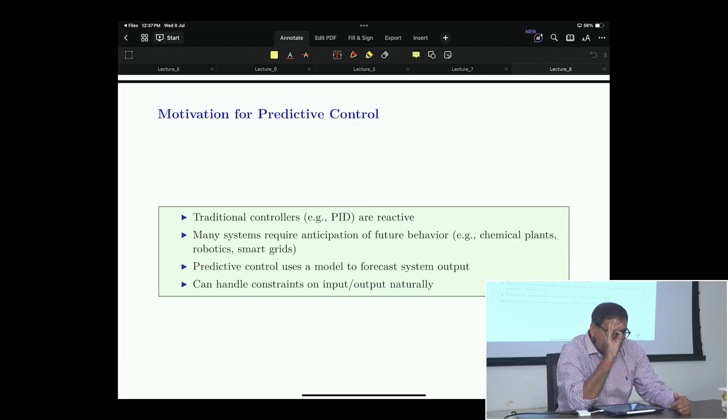So in the model predictive controller, you take a model which will predict, right? Based on the prediction, you design the controller. Got my point? Nowadays you will find in the literature, people use the term model-free predictive controller.

Model-free predictive controller. If you really look into that, I'll tell you, there is nothing like model-free predictive controller. There is nothing like model-free predictive controller. When they say it is model-free predictive controller, what essentially they do is collect the data,

do the online estimation, that estimator is predicting the output. There is no explicit model for that, but they estimate it, right? So there is nothing like a model-free predictive controller. You have to do something to predict it, right?

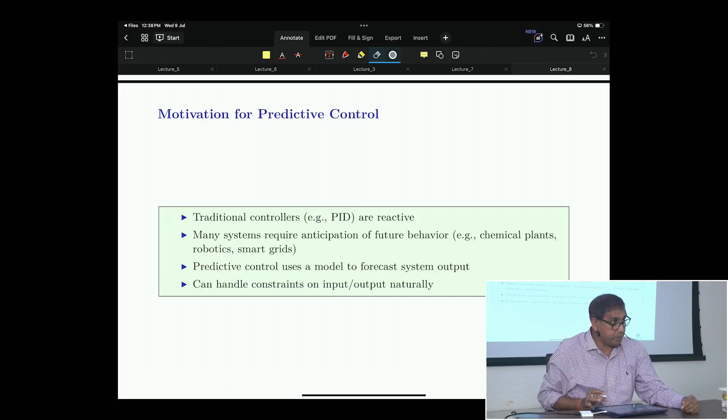So traditional controllers are reactive. Many systems require anticipation of future behavior. Predictive control uses a model to forecast the system output, right? It can handle constraints on input and output naturally.

Okay, let's see. This example, I got it from some book actually, but it's a standard thing.

This example I've taken from a book. This is not my example.

Suppose you are going to cross the road. Crossing the road, actually, Indian people can understand it in a much better way than foreign people.

Once I was in Hyderabad at a conference. Two of my PhD students are from Palestine, Ihad Akila and his sister Lama. So they came with me. I told her, I am going and you come, I will show you Hyderabad also. I have got some students working there.

So I told her I will organize the car and other things, you don't worry for that, those things are taken care of. She said, okay, we will go. So what happened, the conference was in Osmania University, and we were staying in the town.

The bus would come to take us to the conference site on the other side of the road, and we were on this side. There was a bus timing, so I would say, okay Ihad, let's cross. Then Lama would say, Dr. Swain, how can we cross?

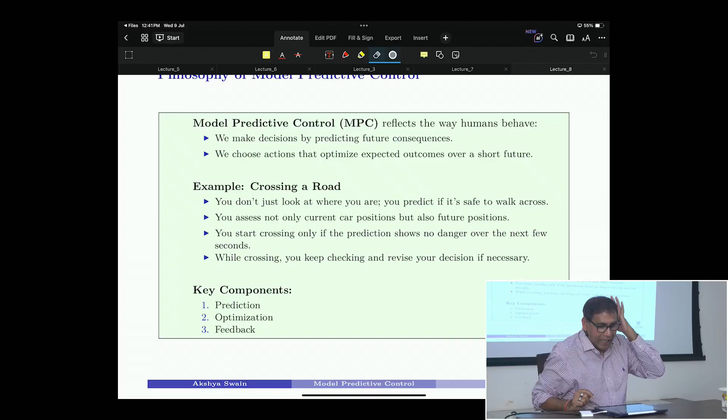So this example is only valid for the Indian scenario, it is not valid for a foreign scenario. Because in a foreign country, if you want to cross, you just see the light and you cross it. Otherwise, if you indicate that you want to cross, even if there is no crossing point, the vehicle will stop.

That is the usual courtesy, the vehicle will stop and they will say, okay, you go. Very standard thing, very standard practice. The vehicle will usually stop, okay.

But let us say this is the Indian system. So when you cross the road, I will go to the other side. First what I will do is take a step and look, this is the prediction horizon. I will look whether some vehicle is coming or not, to both sides I look.

I will estimate in my own mind, which the model will do here now, the speed at which the vehicle is coming, whether it will hit me or not. Based on that I took a step. Not only that, while taking the step, if I suspect some vehicle is coming very fast and it can hit me, I will retract. This is what we do, we always look to this side, right?

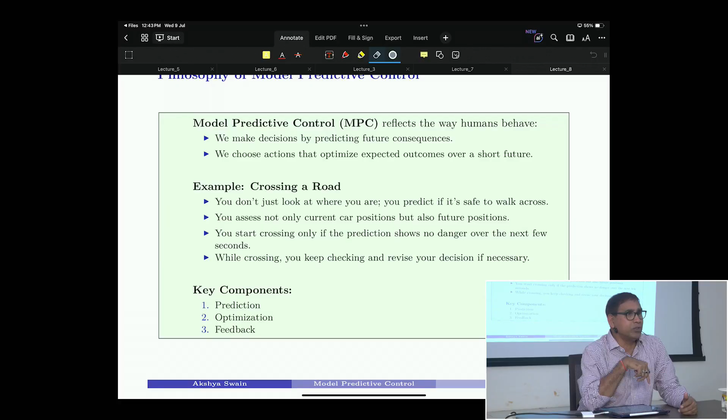So this is the typical Indian model predictive controller, being extensively used by Indians in their day-to-day life. So Indians can use model predictive control, they use it in daily life. For them, it is a play of a child.

So just see what I'm writing here. You don't just look at where you are, you predict. Remember, you predict based on your intelligence. Now what we will do here, we predict using what? A model. That's the only difference, nothing else.

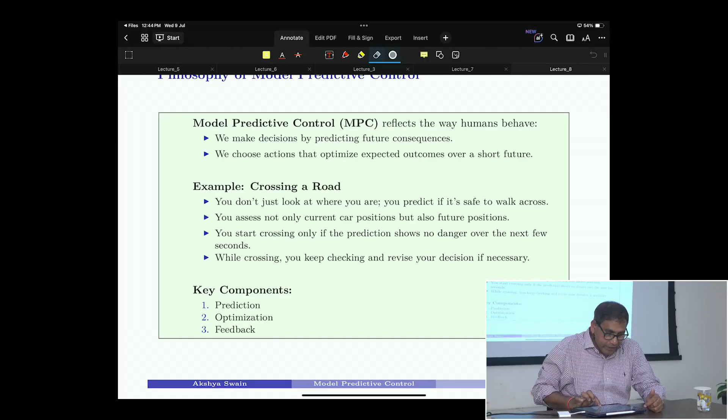You assess not only current car positions but also future positions. You start crossing only if the prediction shows no danger over the next few seconds. While crossing, you keep on checking and revise your decision. This is the point, key components are prediction, then optimization, then feedback, depending on the situation.

Advanced control strategy using a system model to predict future behavior. It optimizes control inputs over the prediction horizon. I'll tell you later on, there's a little bit of a tricky thing here. Then it applies the first control input.

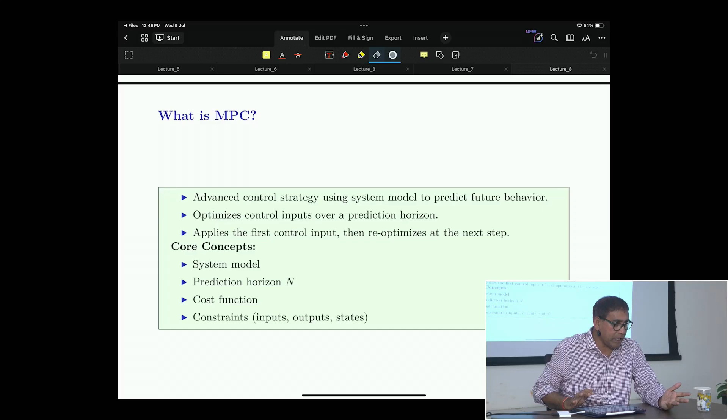The core concept is you should have a system model. You should know the prediction horizon, until what time you will predict. Prediction horizon, cost function, and some constraints. These are the 3 steps.

Therefore, this MPC is very computationally expensive, because at each time step you predict, you solve the optimization problem, you apply the controller, and then predict for the next sampling instant.

So when Manfred Morari did it, he designed it for process control systems, which are inherently slow, because it takes time. You are predicting, then solving an optimizer - it takes time. You can do it in microseconds, you can do it in milliseconds, but it takes time. So essentially it was designed for the process control plant.

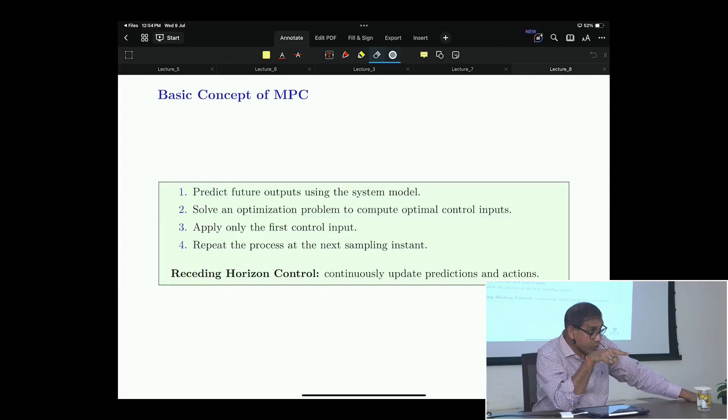One day there was a seminar talk with Neil Munro, who has done lots of work on Nyquist stability criteria and such things. He was at UMIST, University of Manchester Institute of Science and Technology. One day he was delivering a seminar when I was at Sheffield - though I don't remember all the details now. The minimum variance controller involved Karl Astrom, David Clarke, and Peter Wellstead who was at UMIST, a colleague of Neil Munro. Neil was explaining a theorem proposed by Peter Wellstead, and told the others there that Peter did such a great job deriving this theorem, yet nobody remembers it because people don't remember these things.

People will go to the algorithm and see it, because the theorem is important. I remember Neil Munro mentioning Steve Banks, who was editor of the IMA Journal of Mathematical Control and Information and head of the department at that time. Neil told Steve, 'you also do not know - Peter did such a good job, and you do not know, just a small theorem.' We always forget those things, right? Similarly, you must know where things come from. Otherwise, doing these things has no meaning.

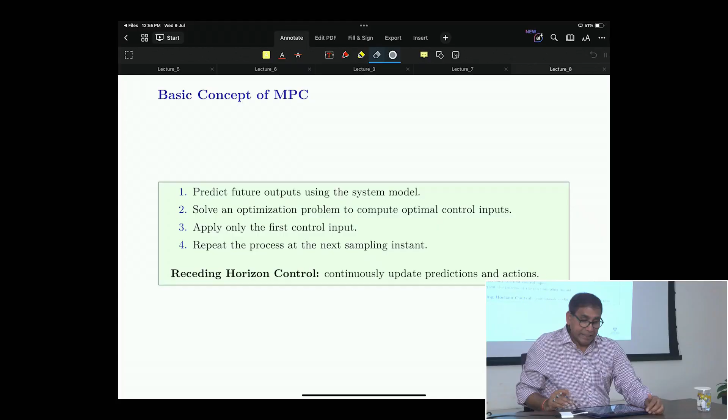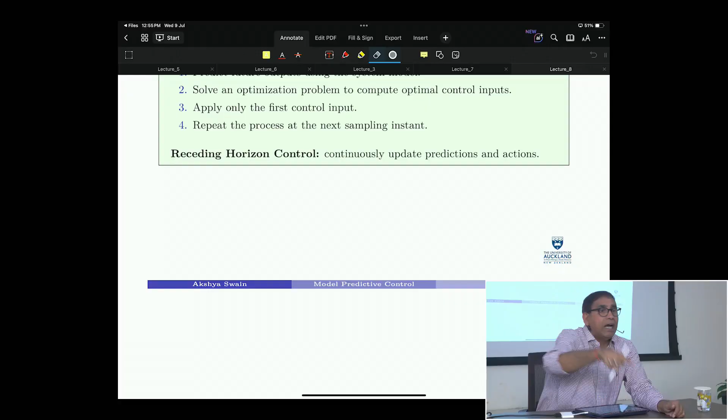Let's go to receding horizon control. This receding horizon principle was first used by David Clarke, and later by Manfred Morari. Receding horizon means you continuously look ahead, and as you go forward, you see further. Until this point, if I go there, I will look a little further, then take my decision - I should go there, then look a little further again. That's the point.

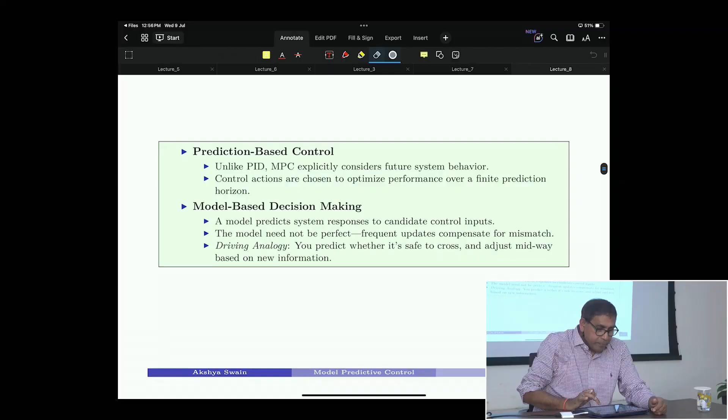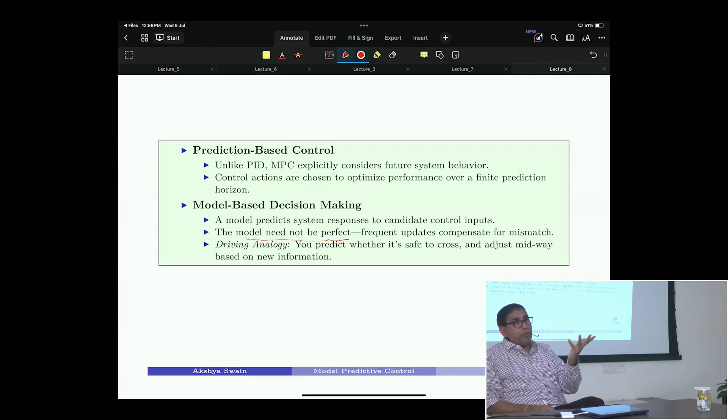Unlike PID, MPC explicitly considers future system behavior. Control actions are chosen to optimize a performance index - model-based decision making. An important point: the model you use in model predictive control need not necessarily be perfect. It is not system identification. Even if there are some model imperfections, we can still manage it - that is the key point. The model may not be perfect, but you require at least a fairly good model to do this.

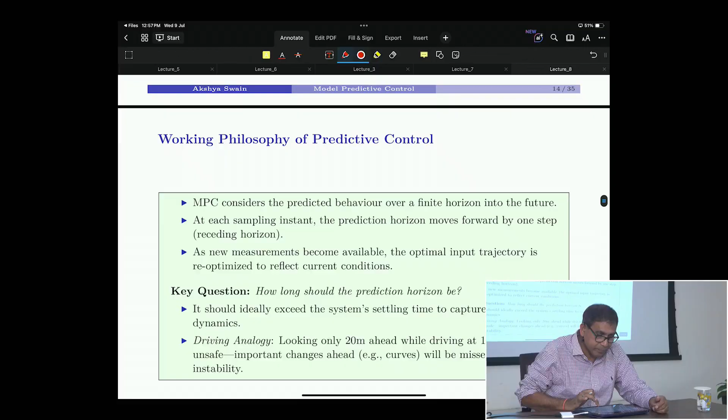Just simple mathematics. Consider a state feedback controller, linear quadratic regulator, linear quadratic Gaussian controllers, even robust controllers - all these controllers in most cases cannot eliminate steady state error, which is a very important component. Got my point? Steady state error can be eliminated provided the system has its own integrating action, or you design an integrator. It is the integrator that has the capability to eliminate steady state error - nobody else can do it. An optimal controller cannot reduce the steady state error to zero. No.

You solve the matrix Riccati equations, okay? It cannot eliminate, right? An integrator must be there in the system to eliminate the steady state error, right? In most of the cases. Why most of the cases? I can take 100% cases, right?

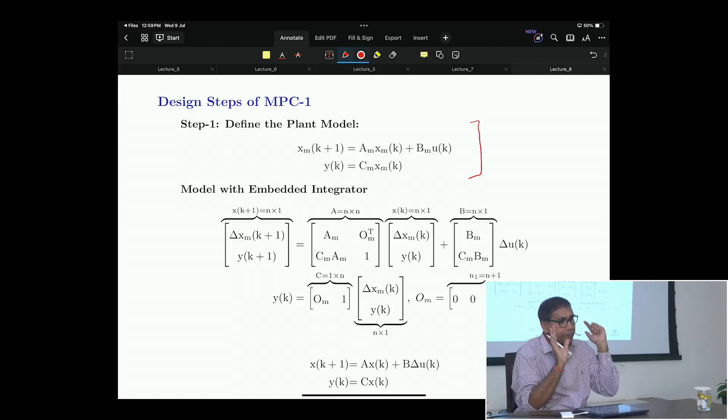What do they do? They integrate one integrator, okay? By integrating one integrator, what is done? They define a new state variable delta xm, which is equal to xmk minus xmk minus 1. The embedded integrator is, then they get this model.

This is not the actual model of the system. This is the model of the system with an integrator. Why integrator? Because to eliminate the steady state error. MPC cannot eliminate the steady state error, right? So put an integrator at the beginning, right? That this model is being used now.

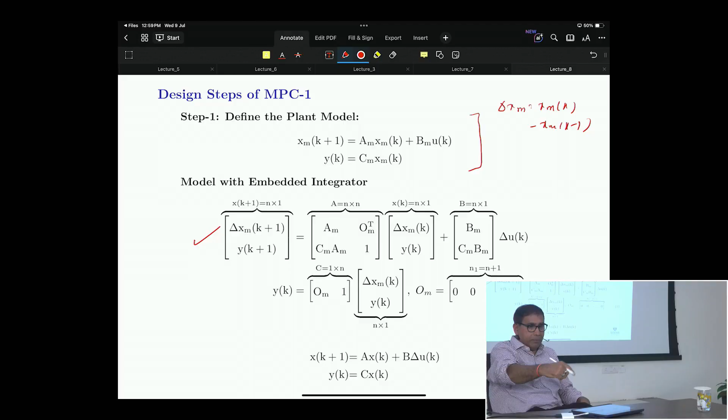Now our model is here. This is the model, this is the model. This is not the model of the system. This is the model of the system with an integrator. I am again repeating the point: this is the model of the system with an integrator, right?

If you are not obliged to use an integrator, if you are not using an integrator, you can simply use that model. That is not a problem. It is not a problem, but at the end you have to use an integrator. Okay, so this is the model: xk plus 1 is equal to a xk plus b delta uk, where delta uk is equal to uk minus uk minus 1.

This model is being used to predict the output over the prediction horizon. Okay, what is yk plus 1? What is yk plus 2? What is yk plus 3? What is yk plus something, right? You predict based on this model.

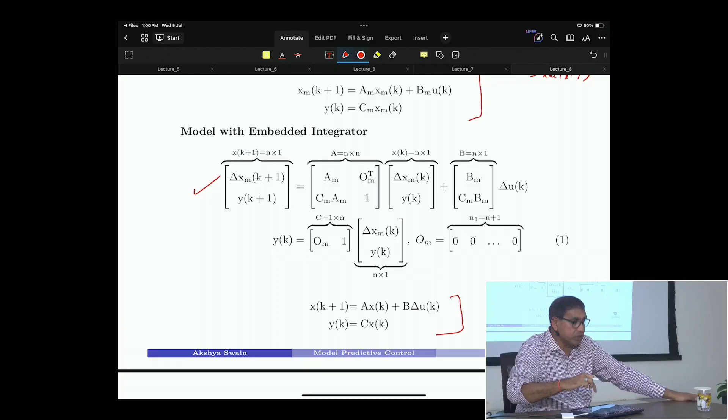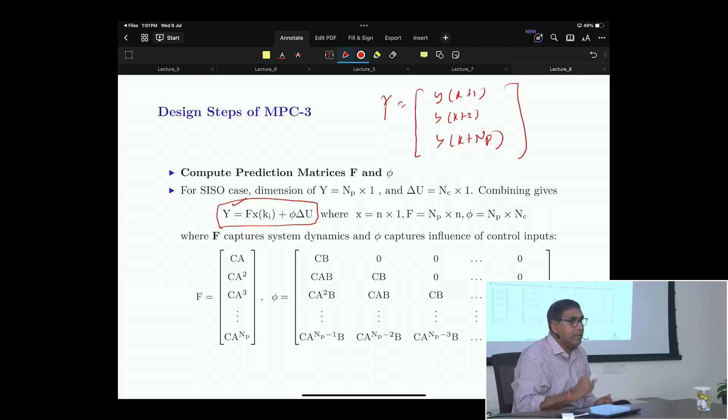I am not deriving those things. Now if you predict it, you will find this prediction model will be like this. This Y is equal to capital Y, the predicted value of the output: yk plus 1, yk plus 2, up to yk plus np, the prediction horizon, up to what step you are predicting. This capital Y here, you see, is the prediction equation.

Yk plus 1, yk plus 2, yk plus 3 — it is possible to do. So if you do it, this is the equation. This is the predicted model or prediction output. F is equal to Ca, Ca square, up to Ca np, and phi is this matrix. Very easy, algebraically you can find out.

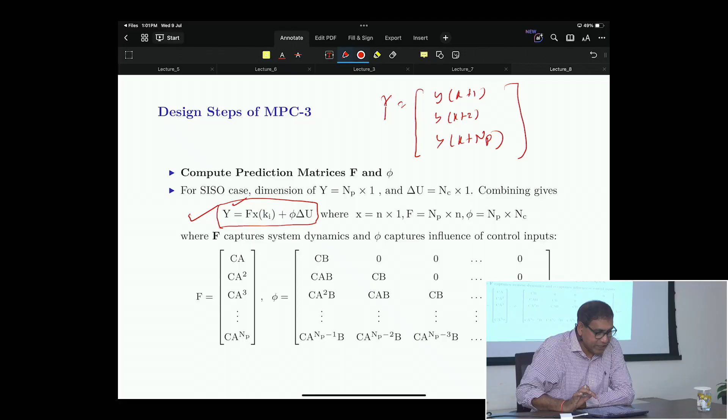Once you get this prediction, then you minimize a cost function. Remember this capital Y is a predicted output over a particular horizon.

Again repeating this point. Y is equal to yk plus 1 given k instant, yk plus 2 given k instant, yk plus 3 given k instant, similarly up to yk plus np. Okay, so these are all predicted outputs. And what you do, this Y, np times — this is the reference signal.

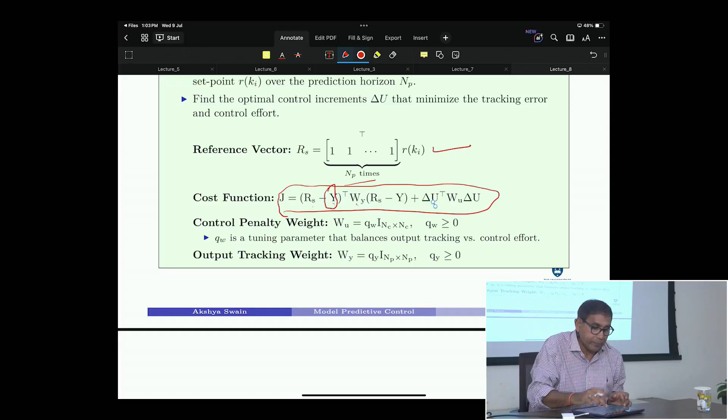So that is the performance index. First you predict, then you optimize. Which one? This performance index: reference minus the output into some weight, and the control input delta U, these things, just like here. J is equal to, I am writing a small way: R minus Y transpose, R minus Y, plus delta U transpose into delta U, in general.

Just a minute, I am just modifying these things here. In optimal control, we optimize J is equal to X transpose QX plus U transpose RU. LQR optimization. Here, you are also doing optimization.

What do you do? Your performance index is R minus Y transpose into R minus Y, plus delta U transpose delta U, right? And you are just putting another weight just to control. So that is the performance index: J is equal to R minus Y transpose W Y, R minus Y, plus delta U transpose W U delta U. This is the performance index — X transpose QX, U transpose RU, same thing.

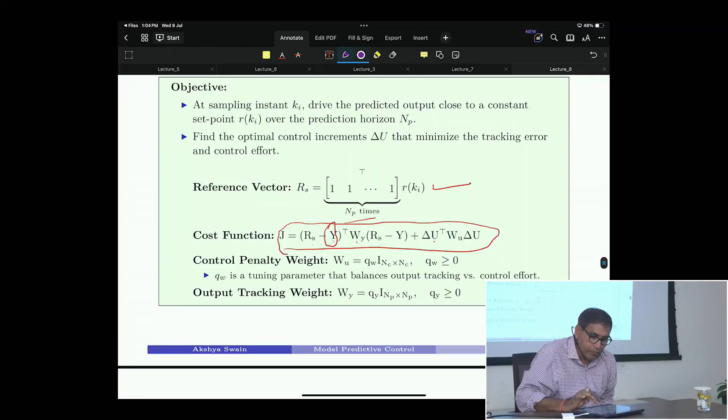So first you predict by using a model, first you predict, then you optimize this performance index, right? Now it will give you these are the weights, control weights. Now it will give you a control law — this is the control law.

This is the control law.

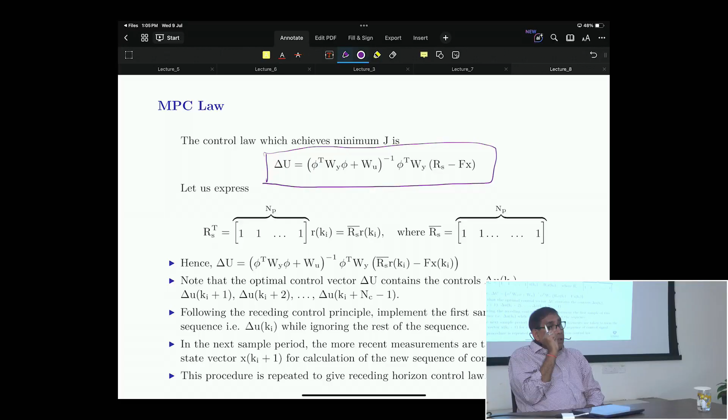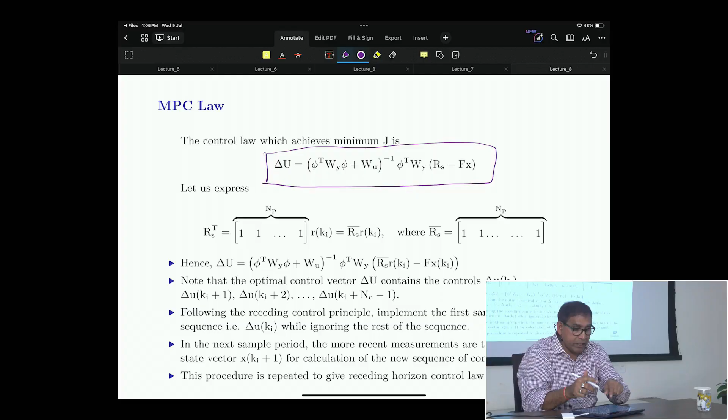If you are using a model to predict the system, you can get a clear-cut mathematical expression, like phi transpose WY phi plus WU inverse phi transpose WY. In model-free predictive control, the optimization is carried out in a different way. You cannot get a clear-cut expression like this, because there is no model, you are estimating the model from the data. Essentially, you will not get this expression. That is the only difference.

Suppose you are using a neural network to predict those Y values. Then you will not get any closed form expression like this. Otherwise, there is no difference.

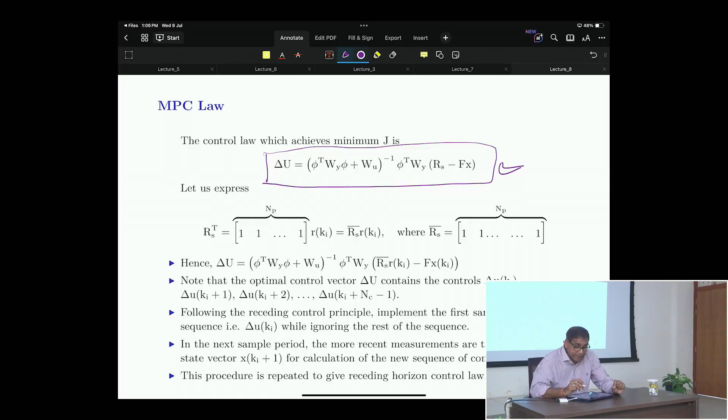So you get delta U. After getting delta U, it itself also has a control horizon: delta U k plus 1, delta U k plus 2, delta U k plus 3. And you use only the first one.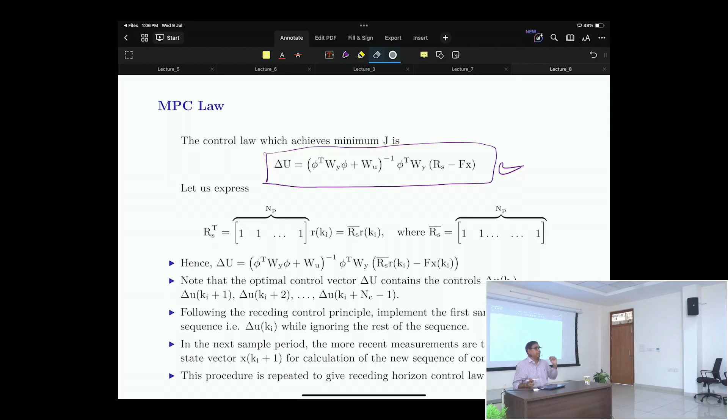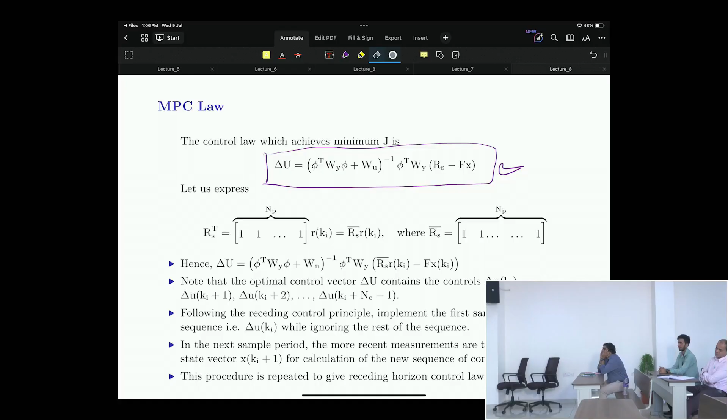Now the question is, are you a fool? If I am using only the first control input, then why should I compute the control input over a horizon? Do you understand the question first? He is telling that delta U contains delta U k plus 1, delta U k plus 2, up to delta U k plus nc minus 1. And you use only this one.

The next step: get the model, predict the output over a particular horizon, that is y k plus 1, k plus 2, k plus 3. Optimize that particular thing, you will get the control action. This control input has also its own horizon, and you use only the first control input in the next sampling instant, because it is online.

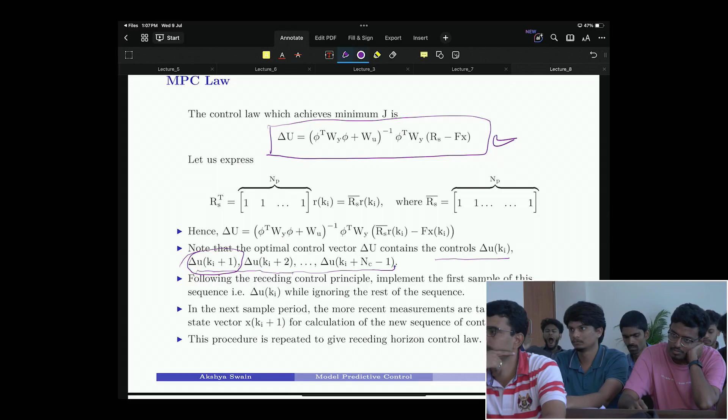This is online. Now the question is, we usually ask the students: MPC will give you a sequence of control actions over k plus 1, k plus 2, k plus 3, and we ask you to use only the first one. That means it's just like this.

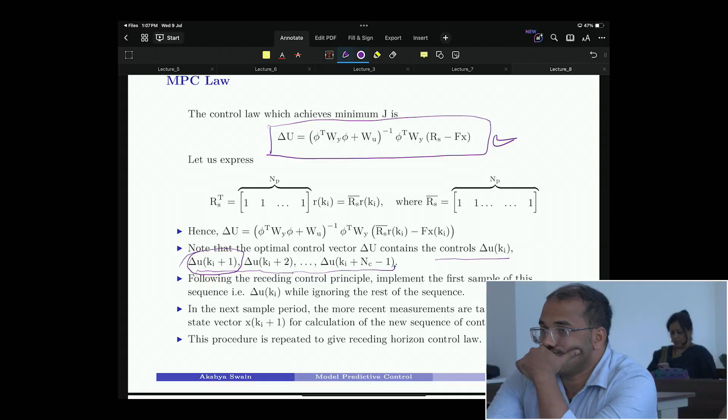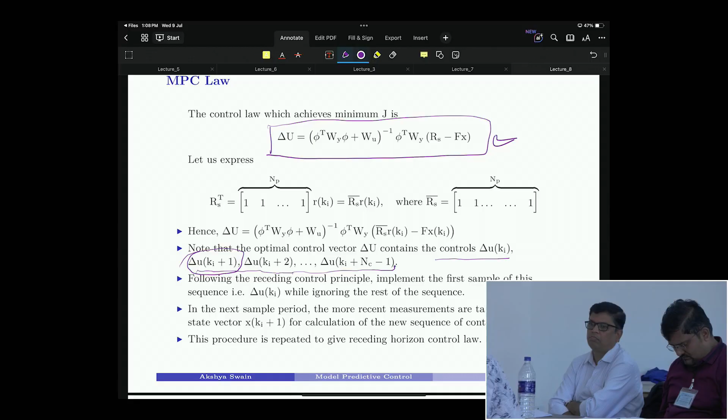You are going to have lunch, so there are dishes. I will tell you, this is one dish, this is another dish, this is another dish, this is another dish, but you only take the first dish. No, then you will say, what the hell are you talking about? You are giving me 10 dishes, and you are asking me to only eat the first dish. Then why the hell did you give these 10 dishes? Do you understand this point? It sounds ridiculous, yes or no?

See, delta U k plus 1, delta U k plus 2, following the receding control principle, implement the first sample. Then if you want to implement only the first sample, why compute all these things? Now the question is something different.

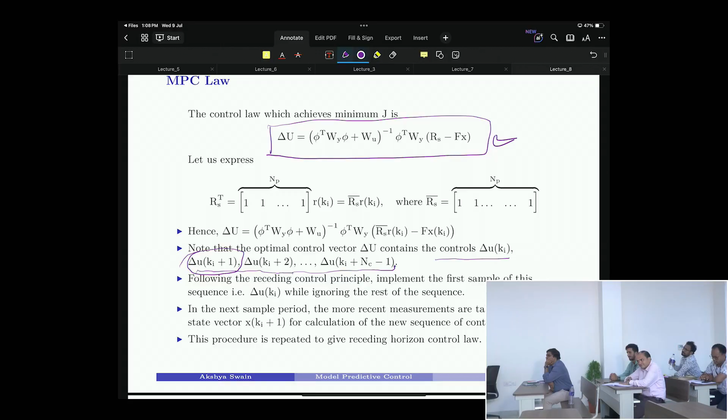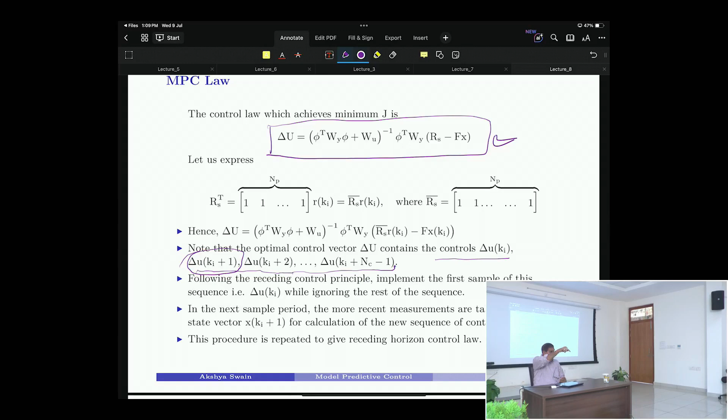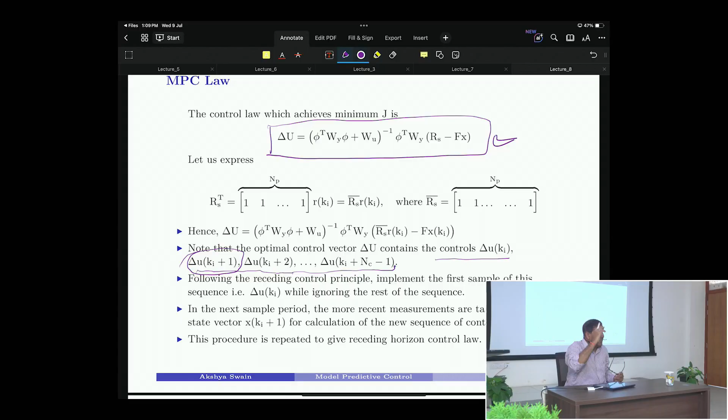This can only be understood from the chess player. You see the chess player, what they do, you know? When the person is playing chess, a world champion, they know: if I apply this control input, what are the possibilities that that fellow will do? If I apply this one, what is the possibility? If I apply this one, what is the possibility? If I apply this one, what is the possibility? You got my point? He has got 10 things in mind, but he will use only one.

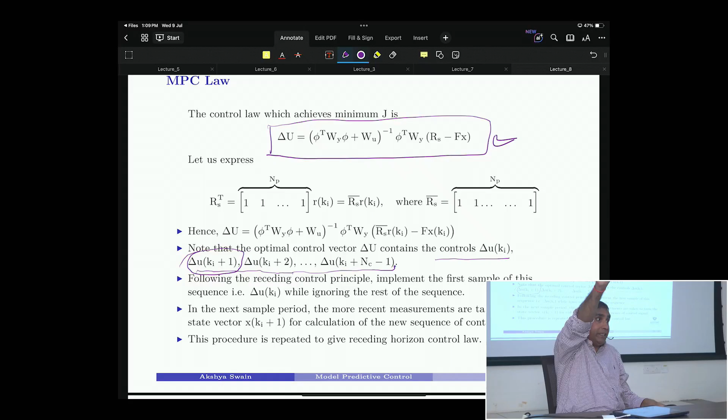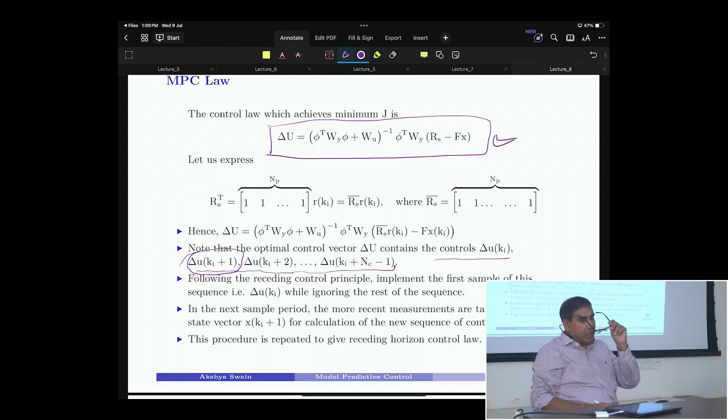And then after that, depending on his action, then he will think. Got my point? The same thing is happening here, it's not myopic. We don't say MPC is myopic. MPC sees many things, but does only one. But it has got knowledge, knowledge that these control actions are there. Got my point? So you have got the model, you have got the optimizer, then you implement these things.

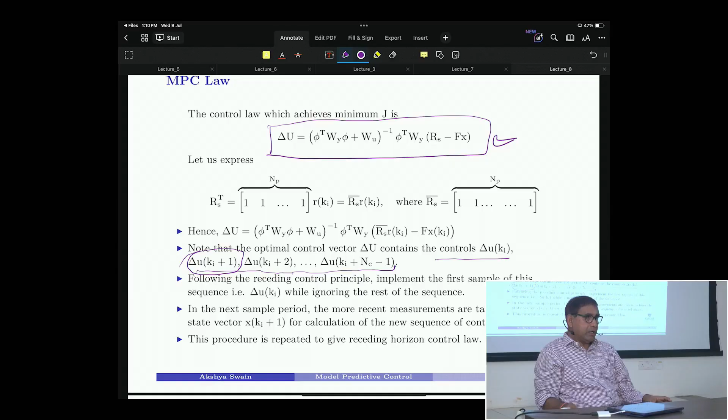Each sampling instant. Because you are doing it at each sampling instant, it is computationally very expensive. If the system is very fast, it is always advisable not to use MPC. Got a point? But if you want to publish papers, that's fine, I have nothing to say. We are doing it, you have to do it. Got a point? MPC should not be used in that place.

Okay, how do we select that, the prediction horizon and the control horizon, NP and NC? In 1987, when David Clarke did it, NP and NC, because I was there in 1994. So, there are many people who worked on this. I'll discuss something about the effect of the prediction horizon on the performance of the controller, and the effect of the control horizon on the controller.

To be very frank, its effect is not that significant if you have a little bit of knowledge about the system physics which you are controlling. The NP should be 10, 20, you should find. Theory says the settling time matters. Suppose your sampling time is 1 second and settling time is 20 seconds, so you take NP at least 20.

Suppose you are sampling at 0.1 second, settling time is 5, so you take NP as 50. Just settling time determines NP. And NC, less than NP, 5 or 10 will do. So it's not very significant - we don't see any significance. That's my experience I'm telling.

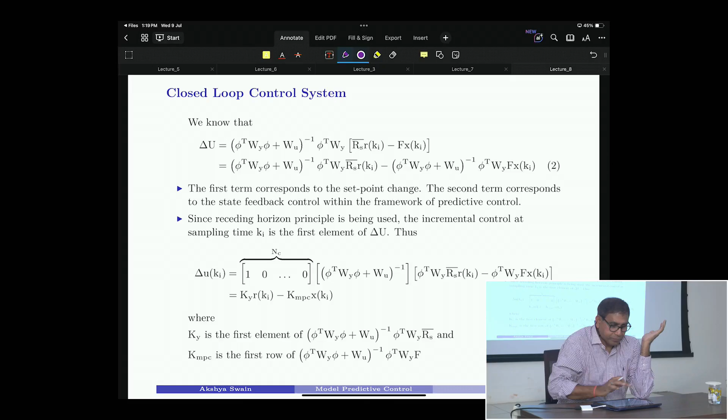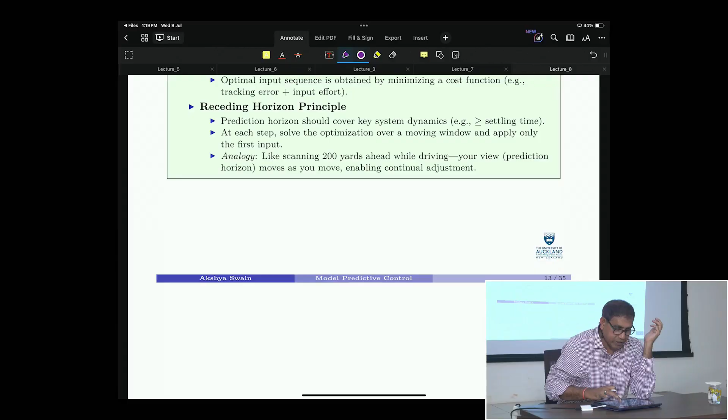Coming to that point, yes I'll explain you. You see here, XMK plus 1 is equal to AM XMK plus BM UK. YK is equal to CM XMK, right?

Now suppose delta XM is equal to XMK minus XMK minus 1, that's delta XMK. Then delta XM K plus 1 will be equal to XM K plus 1 minus XM K, like this, right?

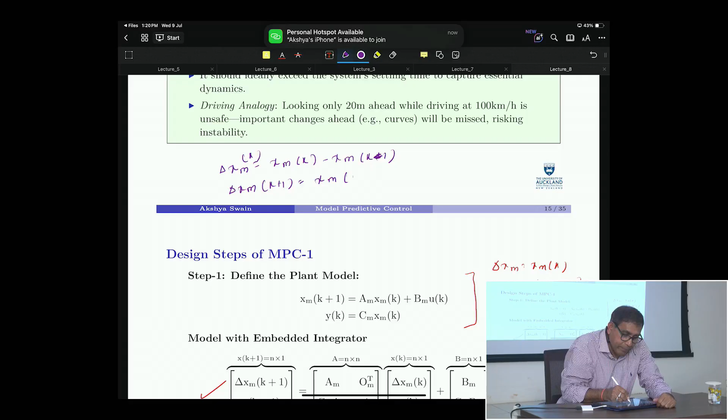Delta XM K is equal to XM K minus XM K minus 1. Delta XM K by definition is XM K minus XM K minus 1. So delta XM K plus 1 will be... let me do it... this will be XM K plus 1 minus XM K. Do you understand this thing? If I am defining delta XM K as XM K minus XM K minus 1, then in place of K plus 1, it will be XM K plus 1 minus XM K, right?

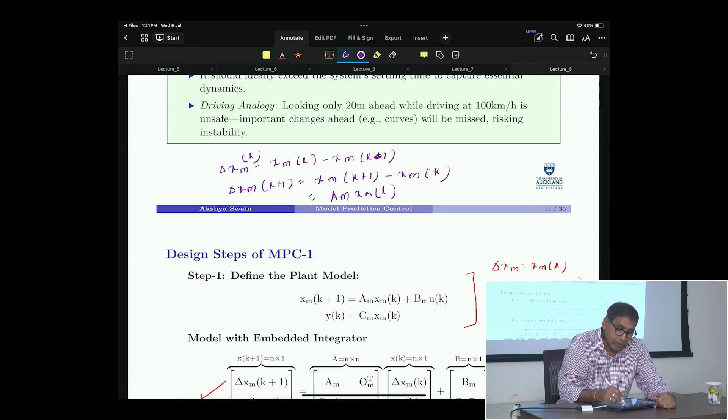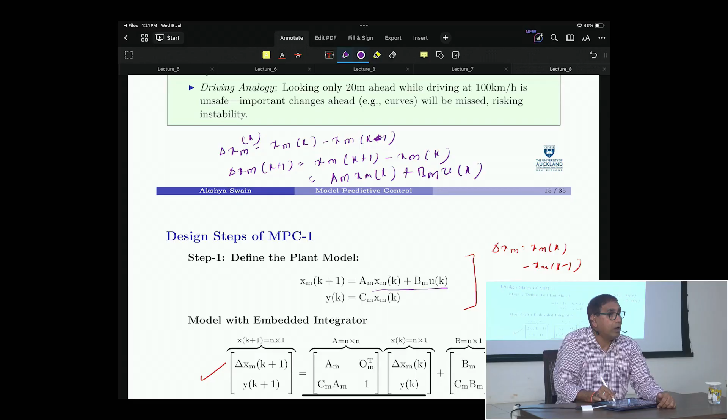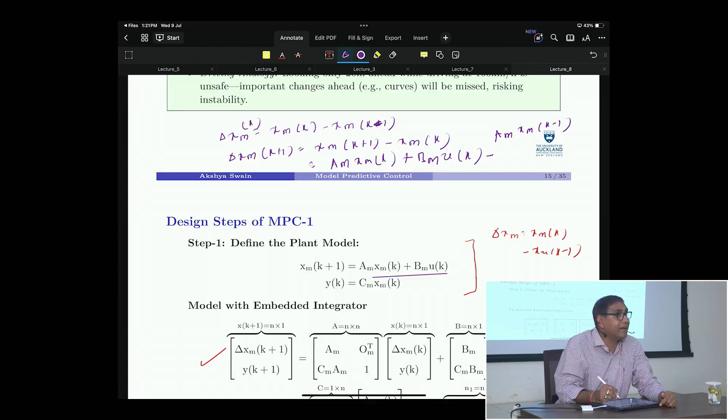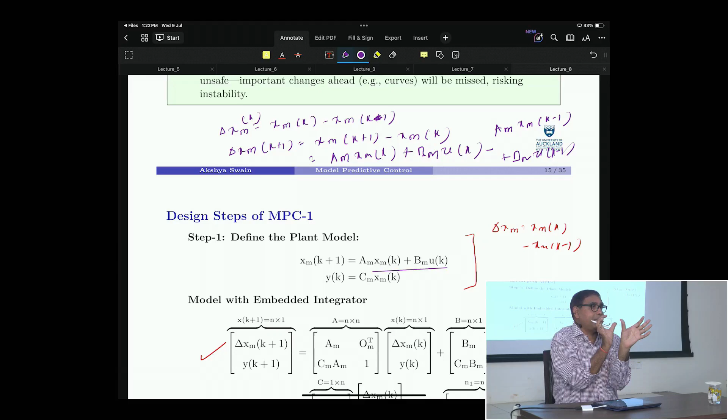Now this one, if you do it, this will be AM XMK plus BM UK, right? Because by definition XMK plus 1 is this one, minus delta minus XMK. XMK is just minus XMK is AM XMK minus 1 plus BM UK minus 1. Now you subtract it together, then you substitute - you see this is AM times XMK minus XMK minus 1, that is the definition of delta XMK, so this model will come automatically. So that way, by integrating, they get it.

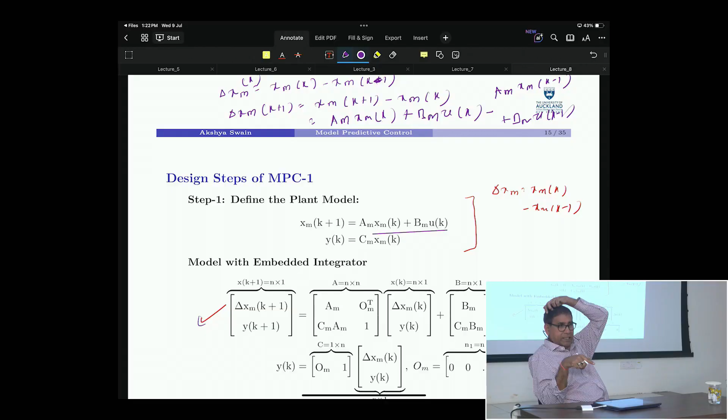This approach has been used by Liu Ping Wang. She's at Monash University, or sorry, in Melbourne. She's in Melbourne actually, this Chinese lady.

Any other questions? Tomorrow we'll study... yes. Sir, with respect to time horizon, what is the difference between MPC, model predictive control, and LQR, linear quadratic regulator?

Linear quadratic regulator, good question. LQR is a reactive controller. It is not a predictive controller because it doesn't predict anything - if certain things happen, you take the actions.

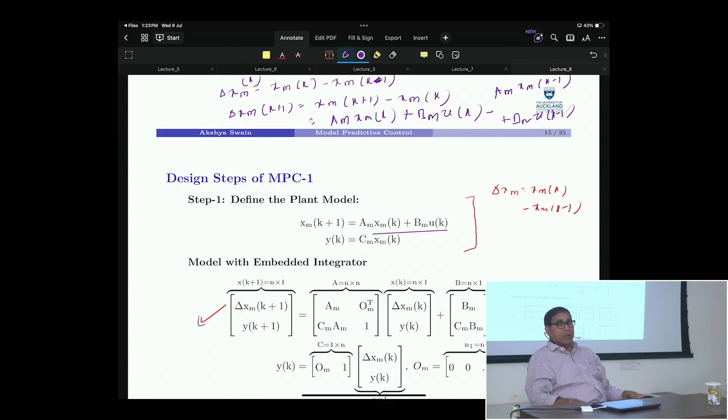No, it's not a predictive controller. Okay, I'm explaining these things. Your questions are very valid questions, no doubt about that. This is why.

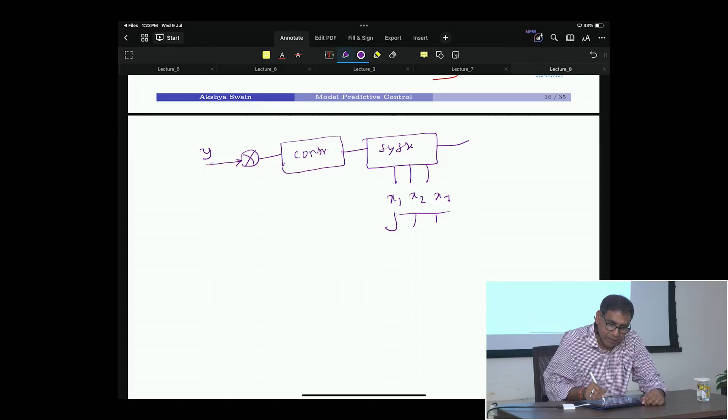Now this is the controller, this is the system. So you get the system x1, x2, x3, right? Then you multiply by some gain k, and this one is going to here, and you apply it. It doesn't matter. Now here, the system is there, it is producing the output.

The state variable is there, x1t, x2t, x3t. You measure it, then you are not predicting. You are not using x1 t plus 1 or x2 t plus 1 or t plus 2, you are not doing that. You measure it and compare with the reference and then apply it. So yes, no prediction is used. LQR, no prediction is used.

Yes, if I do it, yes. It's a predictive controller. You predict, and based on the prediction, you take the action. So therefore it is a little bit powerful, similar to Kalman filter.

We say why Kalman filter is very effective. You predict that this fellow is going to do these things. Then you again take the measurements to check whether your prediction is correct or not. If you check it with your prediction, and if there is some error, you modify your prediction. So therefore it is powerful.

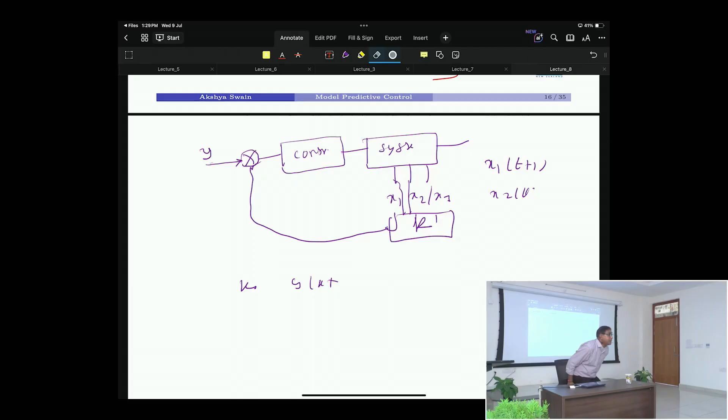And remember, for doing all these things, the prediction horizon and control horizon have no real meaning, it is not that significant. You will find in many power system journals or elsewhere, people get some results 97% accurate, another will get 97.2%. Is it significant?

You got a point? So NP and NC don't have significance, provided it is within the range. And your question previously, because we are not discussing a constrained one. Usually the input is constrained, output is also constrained.

So you have to constrain those things. If you are a layman and you do not have a constrained optimizer, you do one thing: you compute the control law just like this, then you say like this. Without an optimizer, if delta UK is greater than delta U maximum, delta UK is equal to delta U maximum. Just put it like that. That is a constraint, but usually nowadays quadratic programming, there are so many other solvers available.

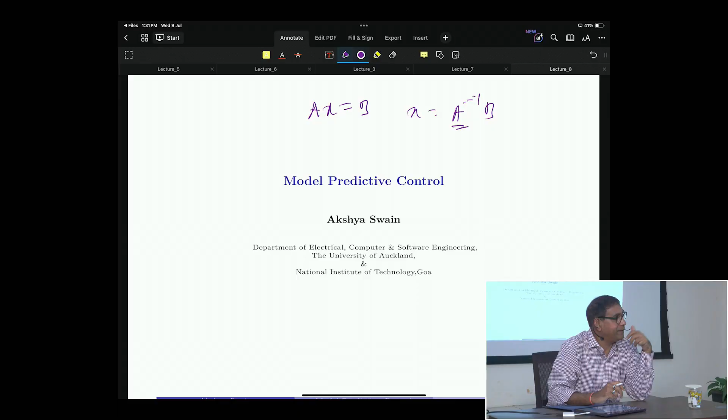But in stability studies, if it is an inequality, do you understand this? You can solve AX is equal to B, X is equal to A inverse B, that is easy. But find out X when AX is less than B, that's a difficult problem, inequality. Inequality does not have a unique solution. Linear matrix inequality is an inequality. Equality is easier to solve, inequality is equal to 1,000 solutions.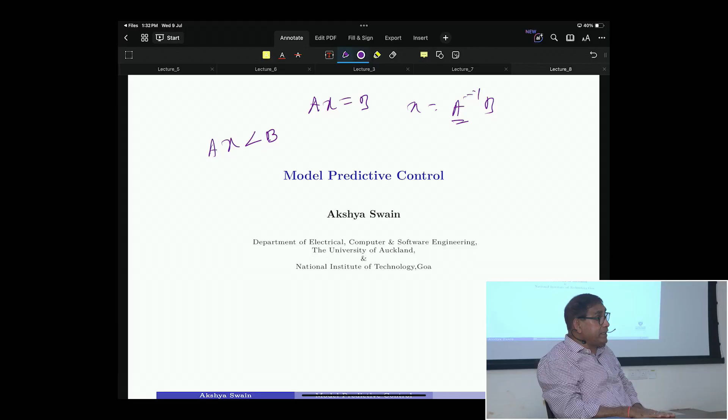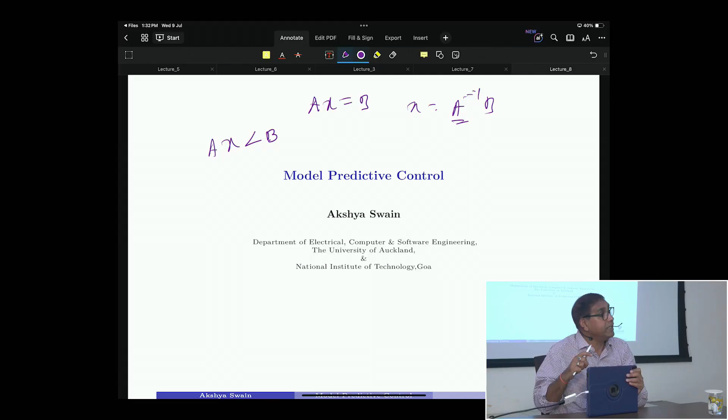So in that case, whenever the inequality comes, especially in Lyapunov stability criteria and many cases, you have to find out, of so many possible solutions, which is a feasible solution. LMI feasibility, they say it. You understand this problem very carefully: equality, inequality, uniqueness, non-uniqueness. So those things are important. Solutions are available everywhere.